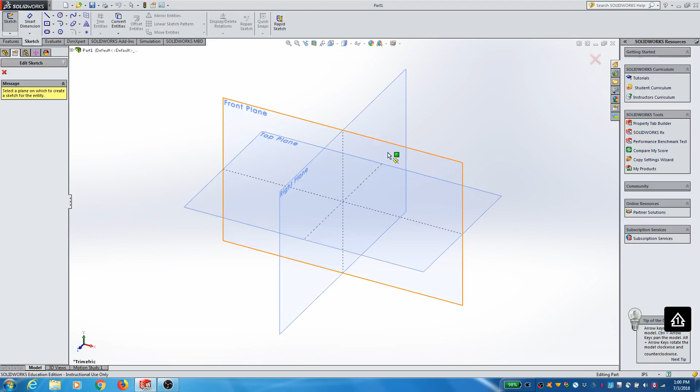I'm going to start by making a simple block, and please follow along with me and make these blocks the same size if you could. So I'm first going to sketch a block, and I'm going to make this block 2 inches by 2 inches by 2 inches, using my rectangle tool. We all should be pretty used to this by now. I'm going to make sure the other side is also 2 inches, using the Smart Dimension tool.

I'm going to exit the sketch, and I'm going to extrude 2 inches.

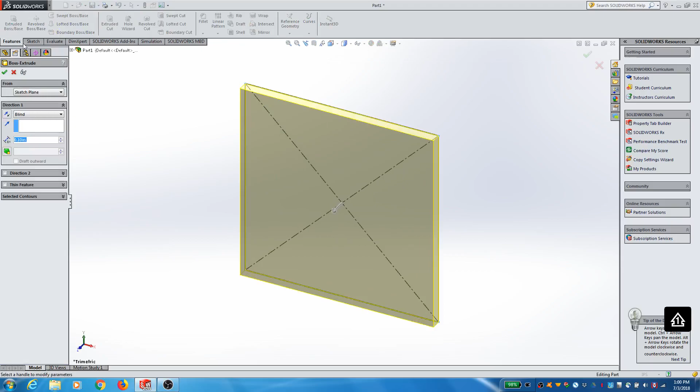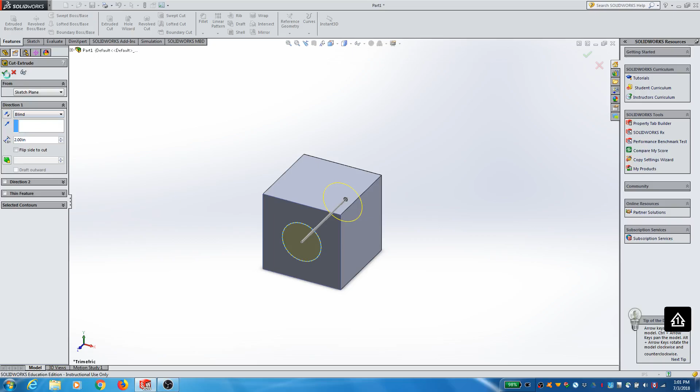Now I'm going to cut a hole on the front. So I'm going to sketch on the front surface a circle, and I'm going to make that circle 1 inch. Now I'm going to cut that through, using my extrude cut, all the way through to the other side. There we go. Got a block with a hole in it, and that's a 1 inch hole.

Alright, so I'm going to save this. I'm going to save it on my desktop, call it block with hole.

And then I'm also going to make another part. So I'm going to come in here and make just a round peg to put into that hole. So I'm going to sketch, and on the front plane, I'm going to make this 0.9 inch diameter—a little bit smaller than the hole that I'm going to put it into.

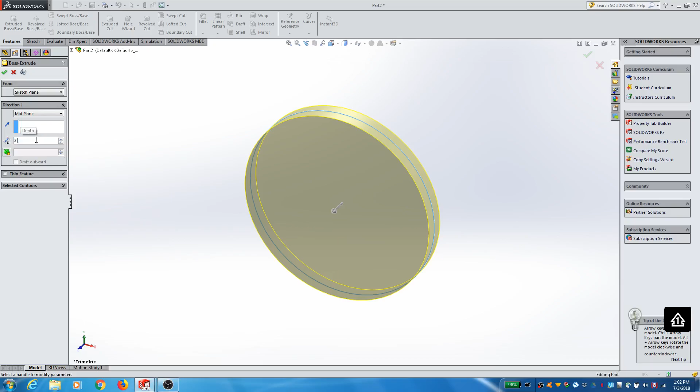Exit the sketch, and now let me extrude this, and I'm going to make it a little bit longer. I'm going to extrude off of both surfaces, so I'm going to call that a mid-plane extrude, and go 2.5 inches. There we go. So I'm going to save this and call it a cylinder.

So now I'm going to create an assembly. An assembly is multiple parts that we're pulling together to produce a final design. So far in our work together, we've only dealt with single parts. Now we're going to start working with multiple parts. So I am going to now make an assembly.

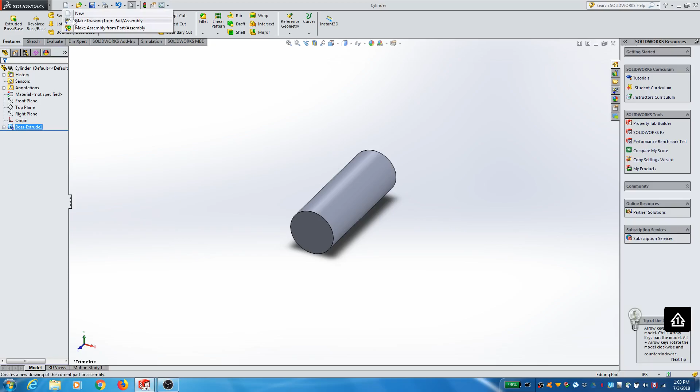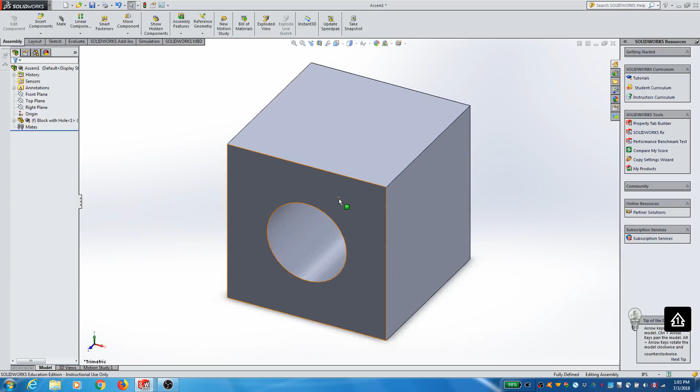I'm going to start by inserting the block with the hole. So this is new—I'm in a new space. Basically what you can do here is insert parts and prescribe how those parts are going to be positioned relative to each other. So here I am, I'm going to select the block with the hole and plunk it down in space. Now I'm going to insert another component, and make that the cylinder. There's my cylinder, I'm going to plunk that down.

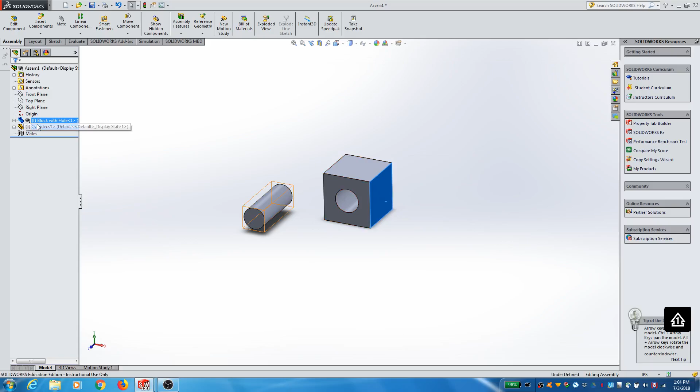A couple things to notice here: this space is just like any part space I'm working with, my same commands let me zoom in, zoom out, and rotate around. The special thing is that in this space, certain parts can move. I can move this cylinder around—it was the second part I inserted—just by left clicking on it. I can't move my block; it's fixed in space, and I can see on my hierarchy that it's got an F in front of it, meaning fixed. I can also spin my cylinder—if I right click, I can spin it around and move it. This is permanently moving it in space.

Alright, so now I'm ready to put this cylinder inside of the hole that I already cut. I'm going to do this by prescribing a mate. Excuse me, a drink of water. So I'm going to prescribe a mate—mates are ways of telling the computer how two parts relate to each other.

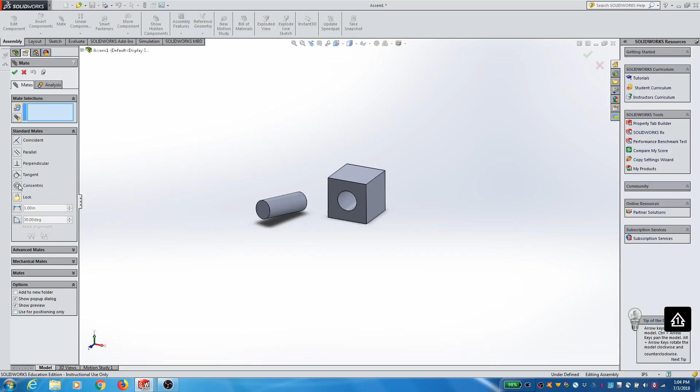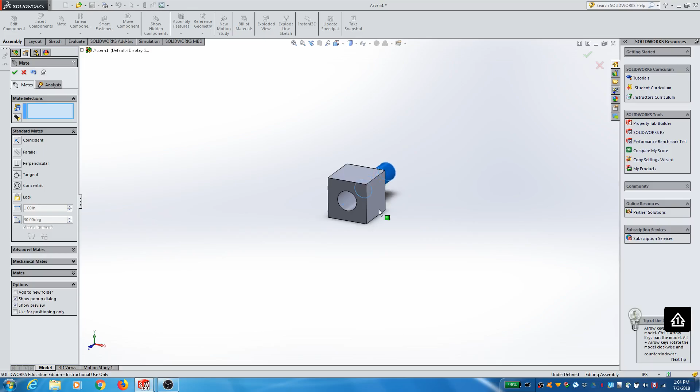So what I'm going to do is use the concentric mate. Concentric is for holes. I'm going to select 2 surfaces that I'd like to make concentric—I want to make this cylinder concentric with this cylinder. You'll notice they line up really nice. I'll click OK. Now if I try to move the cylinder, it'll only move in and out, maintaining itself as concentric with the block. I can also spin it in space and move it back and forth.

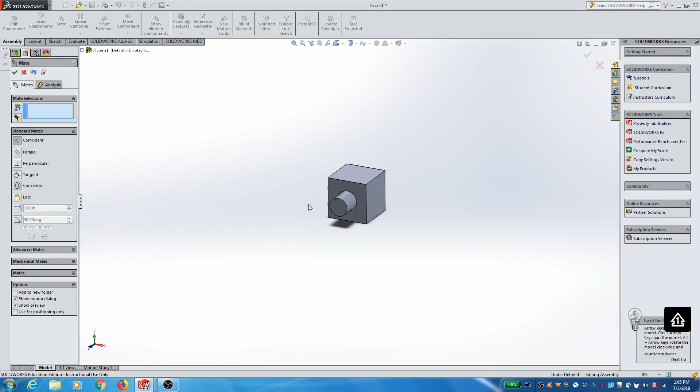Alright, so now let's say I wanted to make the cylinder so that the front face here is flush, always flush with the block face. Let me do that. I'm going to use something called a coincident mate. So I'm going to say that this surface is coincident with—oops, wrong, selected the edge—that this surface is coincident with this surface. You'll notice now it lines up real nice, okay?

So I want you guys to practice playing with these mates. It's very important that we learn how to do the concentric mate right now, and also the coincident mate to make the faces line up.

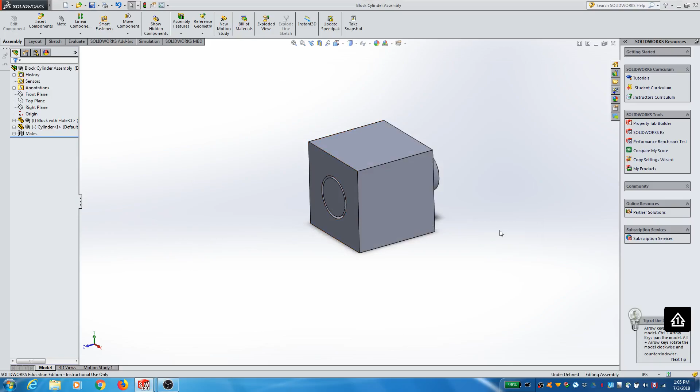All right, when I'm done here, I'm going to just save. I'm going to save this assembly, and I'll just call it block cylinder CYL assembly. Okay, and that's saving these two parts together. So even though I saved individual parts, I didn't save the relationship between the two of them.

All right, that's what I wanted to show you for our warm-up activity, and we'll move on to the next part.